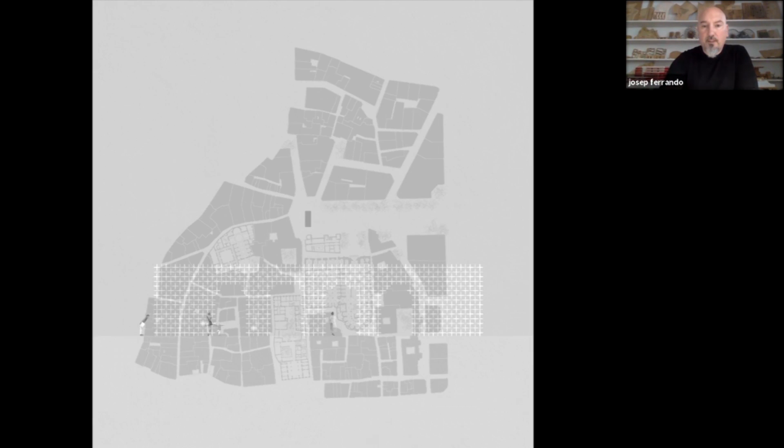And we had to build something related to the word identity. We took the word identity as the architectural and construction identity of Barcelona. And Barcelona had different ages in terms of identity. It was the Roman city 2,000 years ago, later the medieval city, and nowadays we have the contemporary city. Everyone was more or less shown in different, or with some different kind of shapes or constructions.

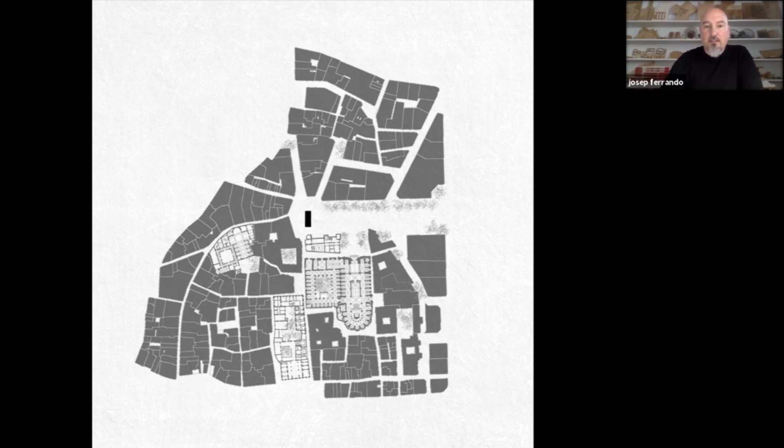The Roman city was related to the Roman aqueduct, but at the same time with the Cardo and Decumanus, so all the organization of the cities. The medieval area was related to the Catalan vault. And the contemporary city was related to the ensanche, the enlargement, designed by Cerdà. So the idea was to build something very abstract, this black piece that we see here, that's 20 meters long by 6 meters wide, just located in the place where the former Roman wall was located. And it's just in the door of the Decumanus entrance.

So what we decided to do is to make the piece as simple as possible, that is able to be recognized or assembled in different ways in order to show these 3 things: the aqueduct, the vault, and the idea of grid related to the ensanche by Cerdà. But first of all, what I was trying to transmit to the students that we were deciding and building together is what 'ephemeral' means.

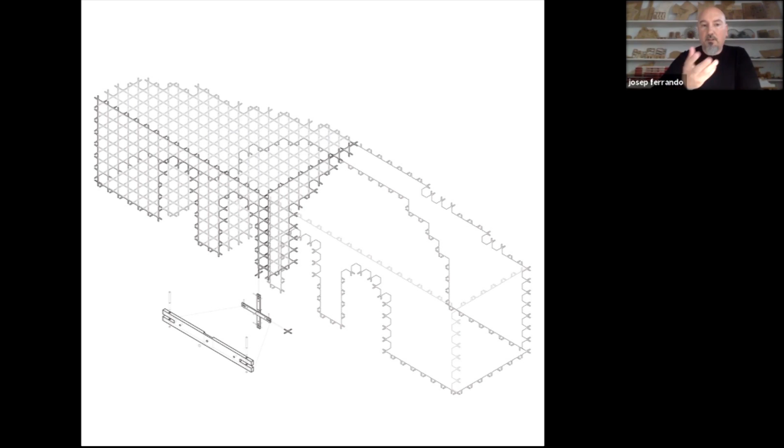For me, there are 3 things that are crucial. The first one is that when something is ephemeral, you should touch as little as possible the place where this piece will be. That means no foundations, for example. The second one is the idea of circular economy - what is ephemeral is the use, but this material is coming from some place and should be going to another place to be used in a different use. And the third one is material efficiency, to use the material as it is without wasting material. That's the piece, as simple as possible.

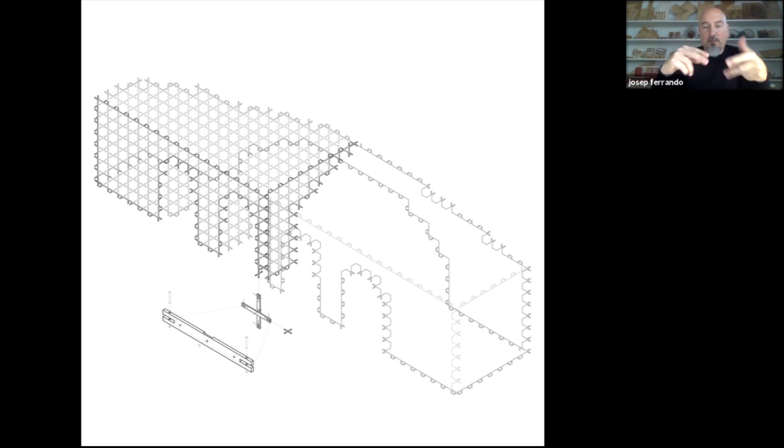That was a piece of 40 centimeters by 4 centimeters by 1 centimeter with some cuts on the limits, so that this asymmetric geometry, 4 by 1, allows us that when you assemble these pieces, the next piece provides 3-dimensionality. These are the minimum pieces that we should have in order to have an inner space, because the idea is always about generating some kind of domesticity or inhabited places. So it's not only a place that you see, it's a place that you inhabit. So it's always like a cave inside the nest.

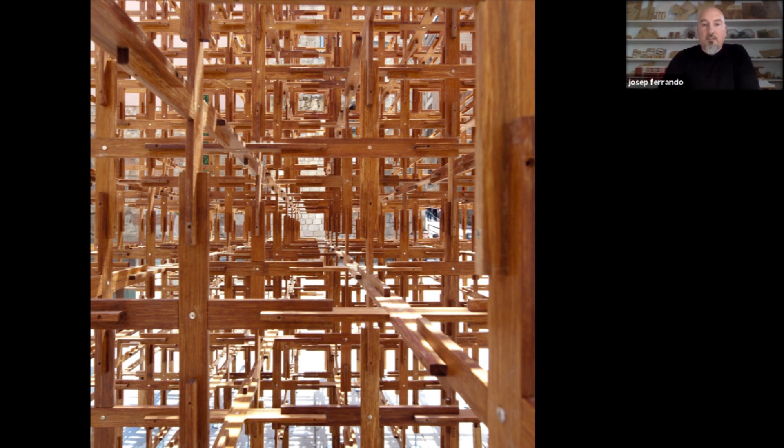So here we can see the pieces and how these asymmetric pieces are assembled, providing the way the piece touches the ground, and giving us an irregular perimeter that didn't allow people to climb. That was one of the worries from the city hall.

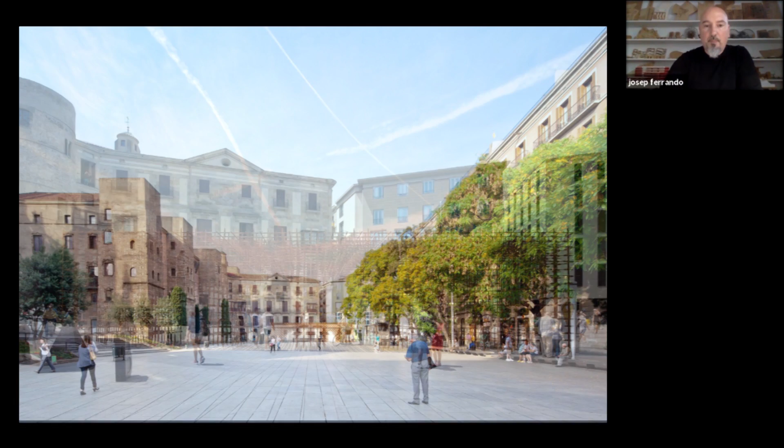You see from that side the aqueduct following the former aqueduct that we have on the left side, and on the other side was the Catalan Vault where they organized different events during the 3 months that thing was here. On the right side, we see people inside. It's like a cave you can inhabit, not only to cross through in a visual or physical way, but even to inhabit.

So in order to touch that place as little as possible, all these elements touch the ground at several points to share the loads, so that you don't need foundations, but at the same time have enough weight that it's not possible to move by hand or by wind.

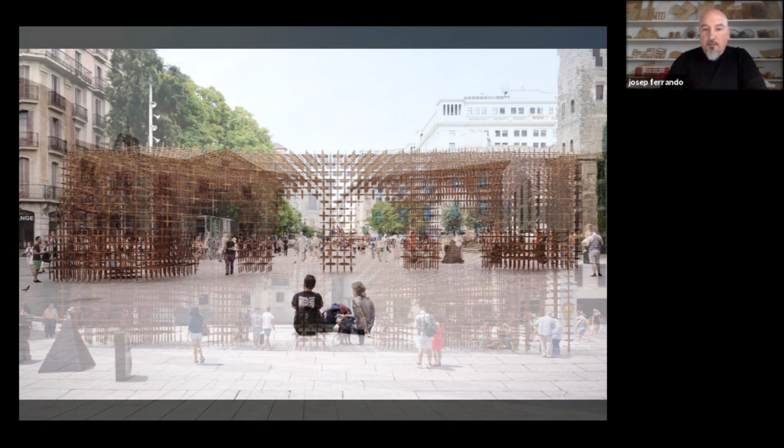The way it touches the ground is the only piece that is different. It's a stainless steel piece, with a screw that allows it to calibrate to the land.

As you know, public space always has inclinations. What happens here is that this stainless steel piece provides horizontality for the pavilion, while at the same time separating the wood, which is the material of this installation, from the wet area of the floor.

After 3 months, all these pieces, in different groups, were moved to different kindergartens of the city. And when the kids destroyed this kindergarten, these playgrounds that they made with them, the pieces were moved to be used as organic compost.

This is another ephemeral installation, in Ocho Quebradas. It's 8 cliffs in the northwest areas of Chile, about 3 hours by car from Santiago de Chile. In that case, a person, an engineer,

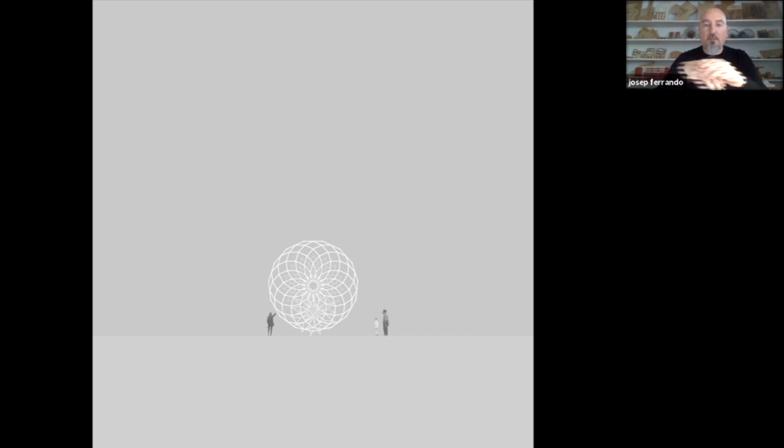is organizing a new housing community with 16 houses: 8 houses designed by 8 Japanese architects like Fujimoto, Nishizawa, Ishigami, etc., and 8 houses designed by 8 Chilean architects, Alejandro Aravena, Max Núñez among them. And the guy organizing all this asked me to design a door, a threshold, in order to arrive to that place.

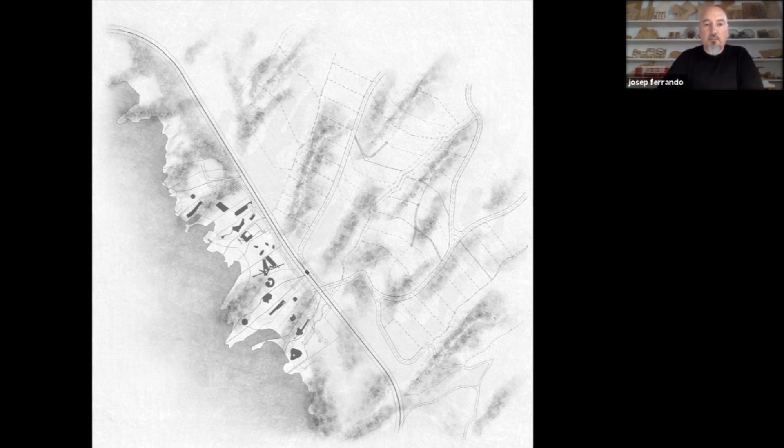That's the place. This is the plan with the 16 houses. None of the houses were built when I was asked to design the door for that place.

When they were sending me these images, the first thing I asked was where they wanted to have the door. They answered, whatever I want. That's the worst answer you can receive as an architect, so it was difficult to decide where to put the door.

But I was always worried about how to relate something to the domesticity of the existing houses that would be built in the future, while also relating it to the landscape scale, even where we don't have these houses.

So it was great, because I decided to put something above, like becoming a kind of basement or the carpet of the project, to understand that the train tracks are the ones related to the landscape scale. It's like a basement because it's horizontal, and it connects the whole country from south to north.

So it's like doing a project that occupies the whole country. At that moment, I decided to begin working on this ephemeral project, related to the idea of movement, and related to the idea of wind.

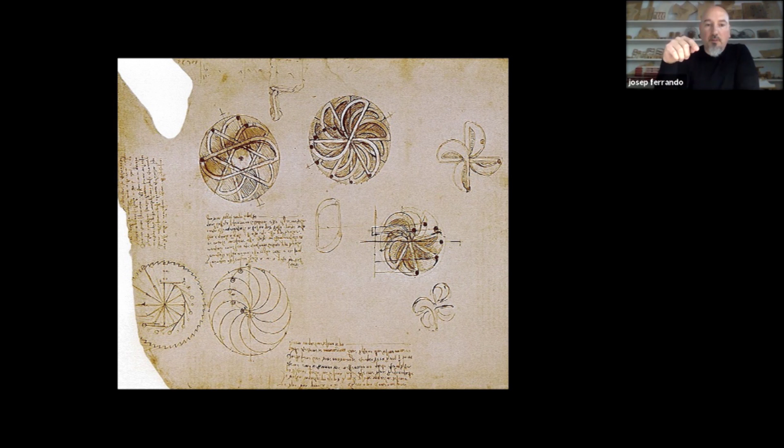Checking how a wheel is not only a one wheel. So a wheel, in order to work, you have to work with a wheel made of wheels. There are wheels that are multiplying the speed, wheels that are changing the direction, and wheels that are collecting energy, etc.

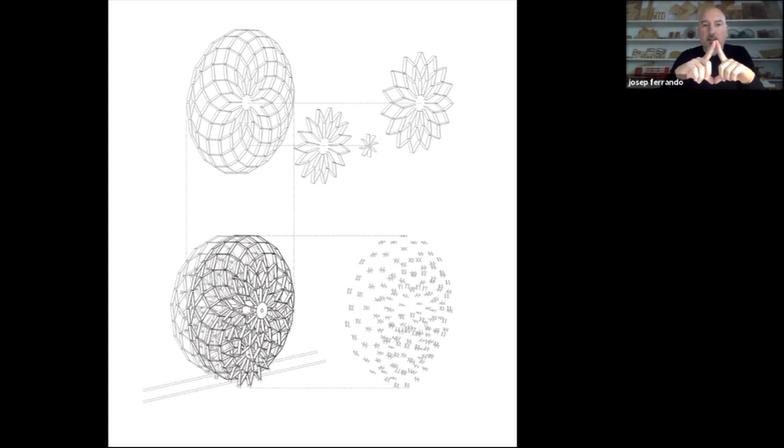So finally, what I designed is this wheel of wheels. It's a wheel made of 8 wheels, made of 800 times the same piece. In order to work with a double system that needs a radial system from the center and a tangential system on the perimeter, I was changing 8 times the angle of this kind of diamond, so the diamond changes 8 times the angle in order to become from radial to tangential.

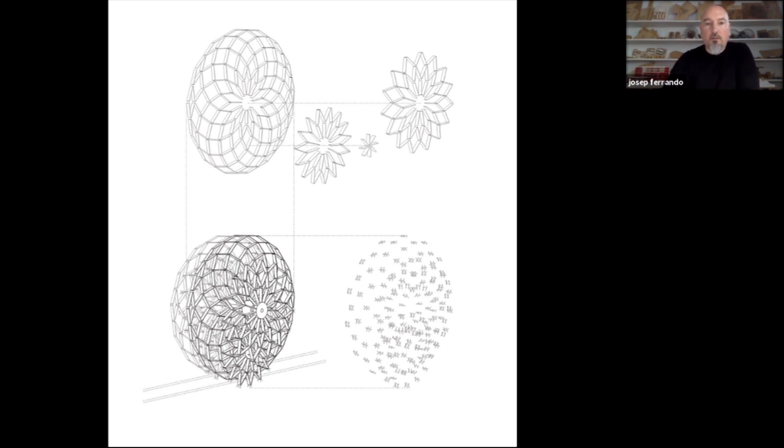There are only some steel joints connecting the pieces, so that the wooden pieces always stay equal, and the steel pieces are the ones that are changing the angle.

There was another challenge: my friend asked me that this piece should be built with 50 students. So after designing it, we made this raw construction with 2 scaffoldings, one following the other, with a crane and a pulley with the axis of the wheel, so that you could build the wheel on the floor.

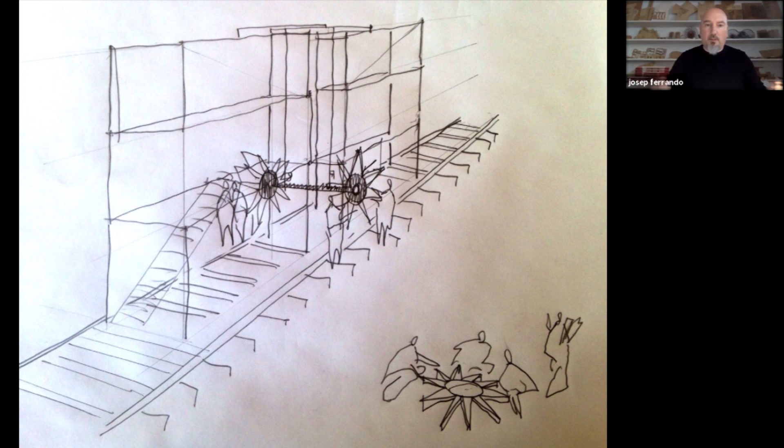The only thing you have to do is make the first ring, then pull up, then do the second ring, etc. And then the smaller wheels could be built on the floor and then put into place.

These are the 4 wheels on the floor. Finally, the wheel is 6 meters in diameter, so more or less it's related to a double height. You feel it has some kind of domestic scale, but at the same time it has the scale to go through. So the train tracks became a pathway to arrive, and the wheel became a door.

I decided to put the initial point of the wheel just in between these 2 dunes, in order to perceive that the wheel is bigger than the train tracks. But when you see these train tracks from far away, it's different — we can see the wheel as a dot in the middle of this. So finally, the project is all the train tracks, but the construction is only the wheel.

And the location is changing constantly. So after the client kept asking me where I should put the door, I finally answered: wherever you want, because the wheel was able to be moved to different places. So the door could be changing constantly.

The third one of this first group is an ephemeral installation from last year, 2019, in Barcelona. Barcelona organizes every 2 years a fair about construction, one of the most well-known fairs in Europe about construction. As you know, fairs are always plenty of stands, each with its own brand and products, but the organization was running a competition to build and design the common areas.

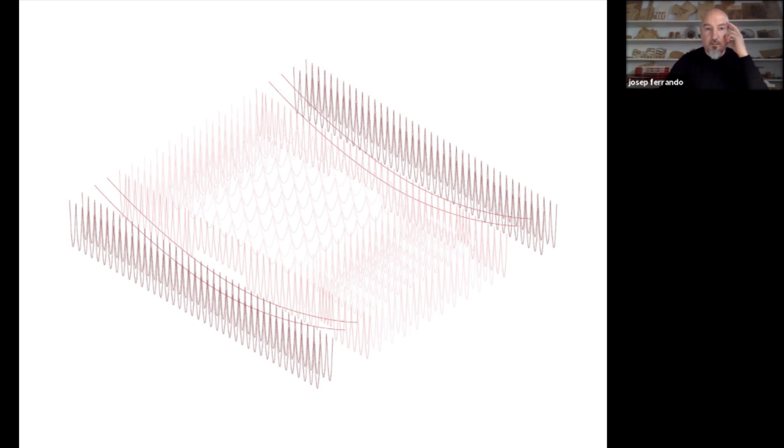So finally, I obtained all the material to make the space and all the material to make the furniture for free, using waste material. This is the axon of the space called Talks, the space for lectures. There's also a space for meetings and one for the future, but I'll focus on the Talks space.

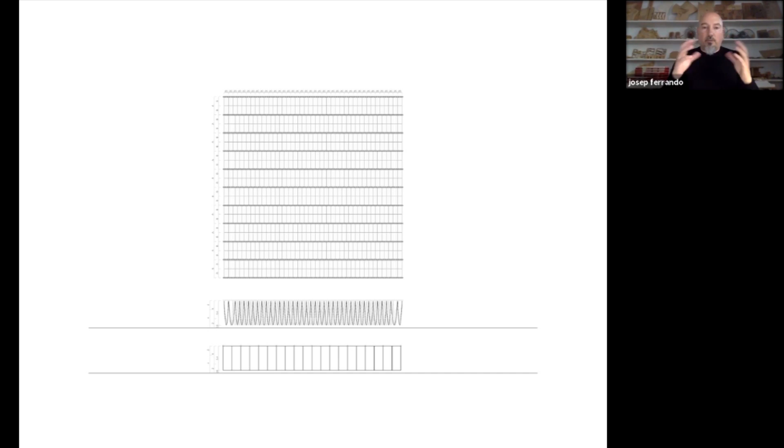So when you work inside another place, like this one inside a Congress building, you have to understand that you are always embedded in another place, so you have to take care of the rhythms of that place.

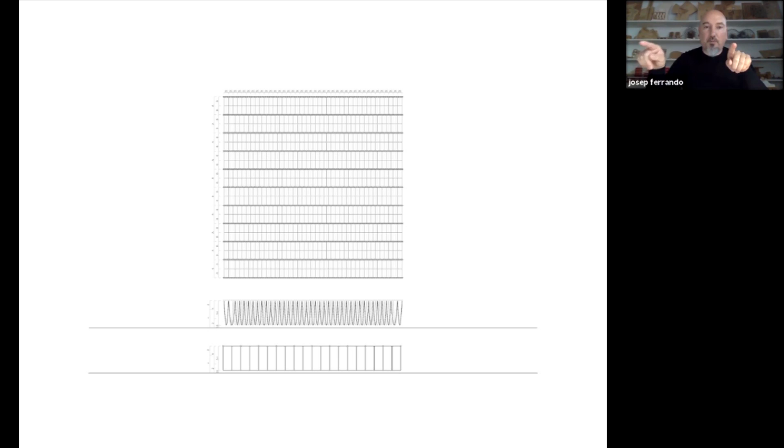So the horizontal darker gray lines are always the trusses, which depend on the rhythm of the structure. These trusses are always separated by 4 meters, the distance of 2 rolls. At the same time, the rolls always have catenaries related to the rhythm of the triangular shape of the trusses. So everything is very connected and embedded, so that finally it seems nothing happened.

In order to enter, it's always the idea of a door. And entering is not about crossing a door, it's about approaching a place - how you enter a place for a lecture, coming from a building that inside has 12 meters height.

So from 12 meters height, you pass to 6 meters height, which is the upper part of these catenaries. Everything is hanging from 6 meters height. Then you go down, down, down, to 2 meters, and you cross - you have this sensation. You go through this process from 12 to 6 to 2, then you turn 90 degrees and begin to enter that place - the space for the lectures.

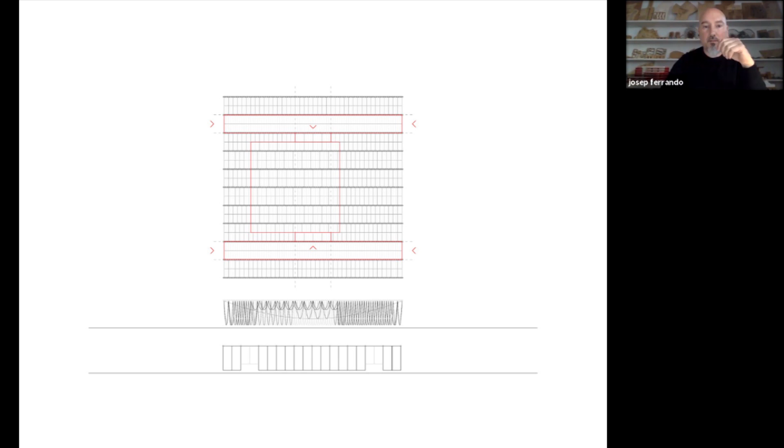Those were some of the images. Obviously it didn't happen exactly like this because not all the beams were equal. So finally what I decided with the beams was to group them by colors and lengths, and the idea, since they work as beams, was to have the longer ones in the upper part and the shorter ones in the lower part, in order to work as beams, as you will see later.

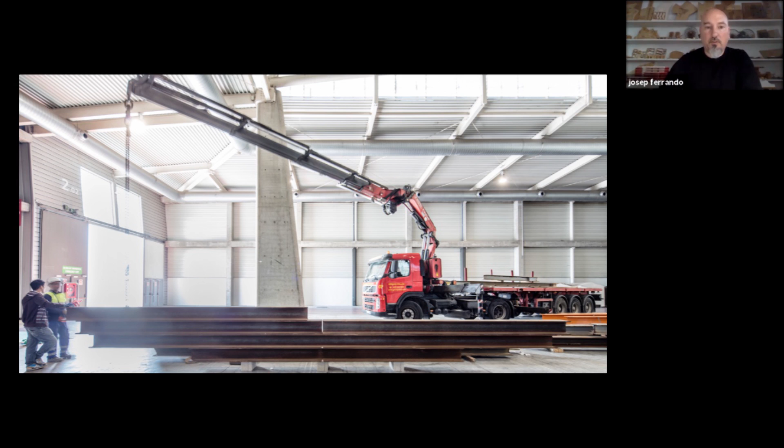This is the space behind for the VIP area, for the people giving the lectures. And these are more or less some pictures of the construction. This is the same truck that came from Sagrada Familia - they put these pieces in the way we asked, since we were designing and thinking at the same time as the construction.

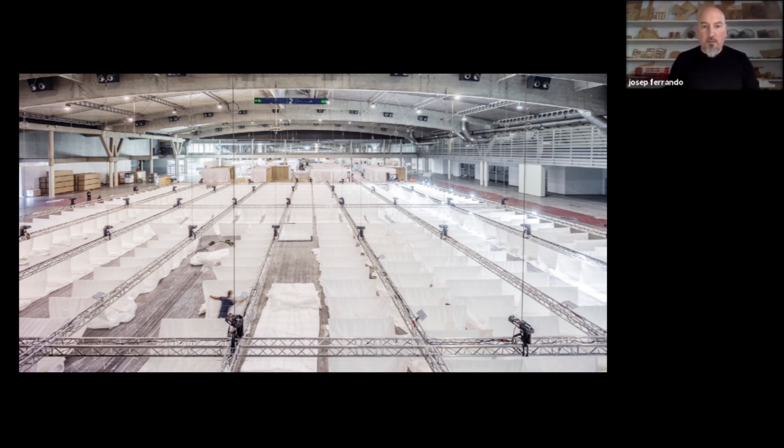That's the construction of this piece for the Talks space, 40 meters by 40 meters, with all the trusses related to the structure, cables, and everybody working on that. So finally when they finish that, they move up, the trucks enter with the beams, they put the beams in place, and then we move down again. This is again under construction.

You can see here how the beams were selected per color, and later selected per size. The shorter ones were on the lower part in order to work as a beam with cantilevers. The last ones are almost 20 meters and 1 ton in weight.

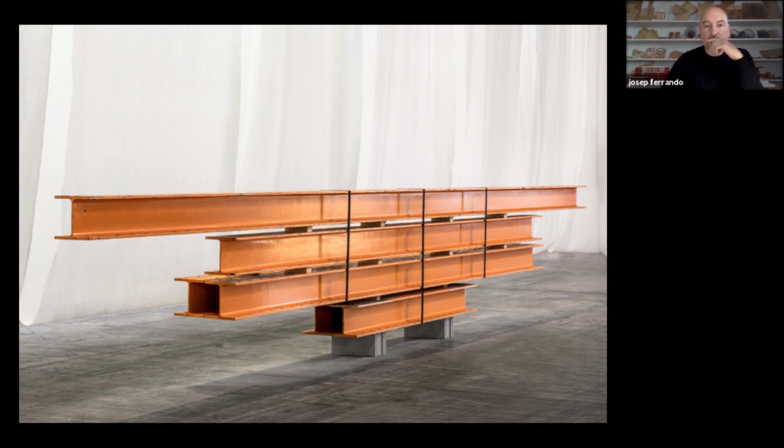They were stacked in order to define levels of benches, tables, or bars, using the shapes and levels of that, with small joints in between in order to build and stack it with cranes, and to be able to remove it.

For the people crossing in that direction, every 2 pieces, so every 4 meters, the module of the catenary was moving half a module so that you weren't able to see directly in that direction.

Finally, after 3 days, they rolled it up again, and now they are used in different roofs, etc. The beams are again in La Sagrada Familia, in fact 4 blocks from here.

I'm going to domestic infrastructures. I will talk about 3 houses very fast: one is in the landscape, another one is more like in an urban space, and the other one is inside another house.

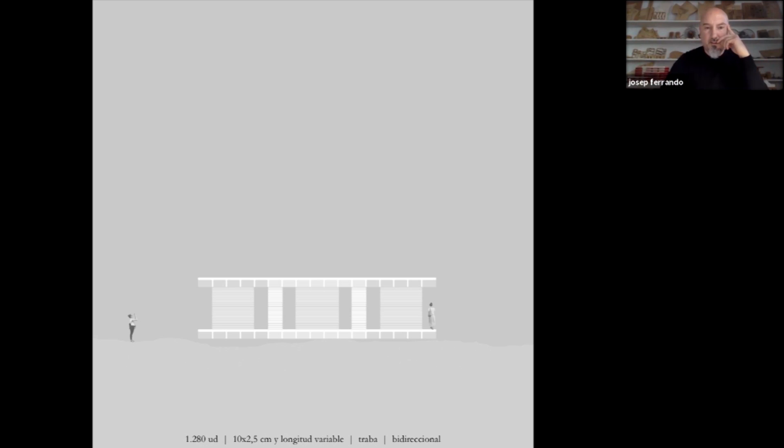And then in the same area as we're seeing here, the house that I did is that one. It's a house that is bidirectional, a square because it doesn't have location, so it will have location in terms of how you use it.

The second thing is how you do a house that is for everybody and for nobody. So it's a holiday house or weekend house. What I did is a square made of 9 squares, called 8+1, because there's one you are not able to change.

That's the one in the middle. It's a very vernacular house, because it's 8 squares surrounding 1 square in the middle that is the fire, the kitchen. So it's very vernacular in that sense.

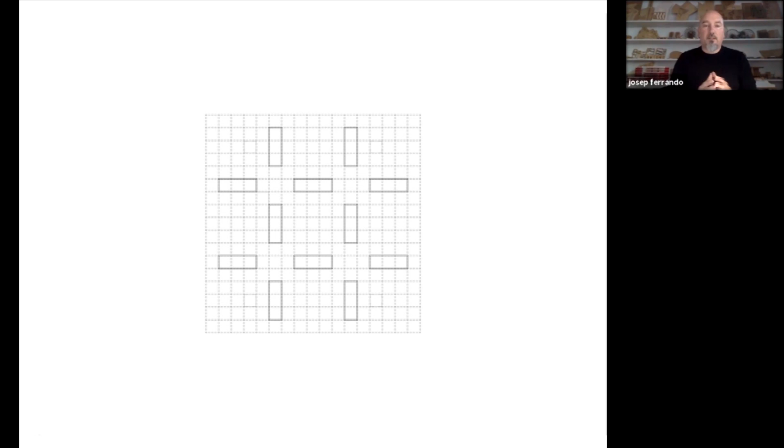The 8 squares surrounding that piece are defined by these wooden blocks. This one has wet facilities, so water facilities, or a storage space—a way of having a non-hierarchical space, undefined spaces, that you can occupy as you prefer.

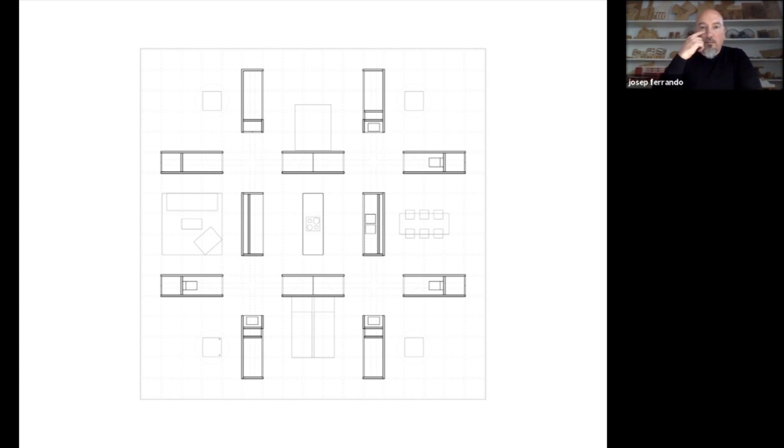That means you can have, as we're seeing here, in the lower part like 2 single bedrooms, and in the upper part 1 master bedroom or dining, living, always with the kitchen inside.

Then the question is that instead of having a room for the bathroom, it's to have a plurinuclear bathroom: the toilet in one place, the shower in another place, the sink in another place.

The idea is that the space that is like a cross inside the square works like Marcel Duchamp in his studio. It's like a door with 2 halls, so depending how you open the door, you're closing one space and incorporating one to another. You can inhabit the house as you want.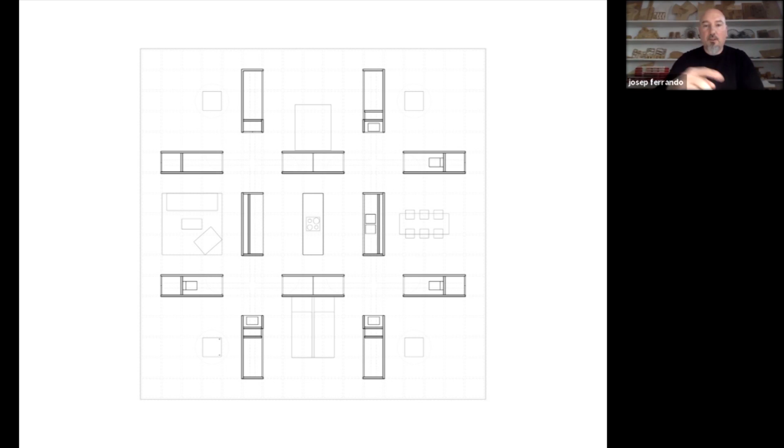I was putting some conditions, like wanting the 4 corners to be an open room, not an inside room, in order to understand that this is a house not provoking convexities to the landscape—it's always embracing, provoking concavities to the landscape.

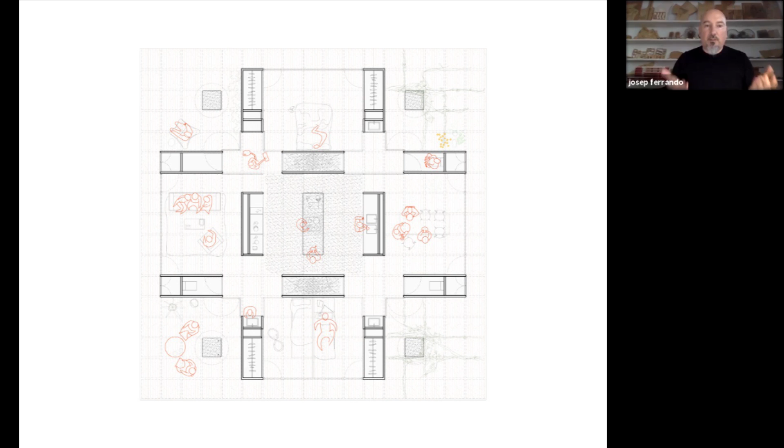As you see here, the floor is a wooden grid that sits above 4 big concrete beams, which separate the wood from the floor, but at the same time organize some kind of horizontality in that area.

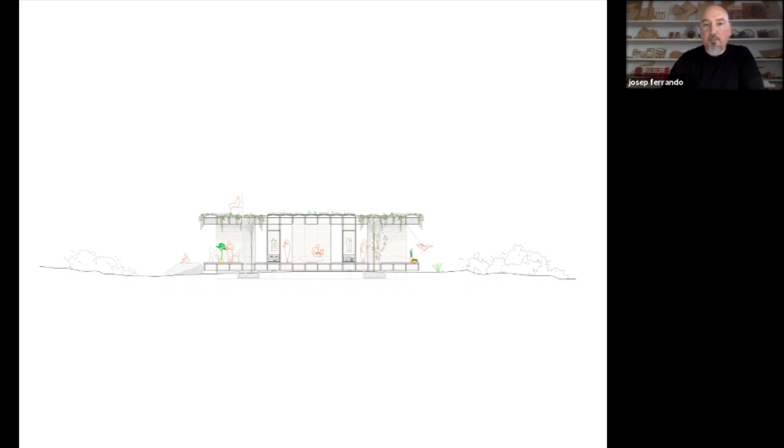There's some kind of assembling spatial system, so you're living in some kind of a joint of wood. In this exteriority, the pavilion tries to be like an unfinished project. It seems like an unfinished construction or like a ruin in some way. The corners are occupied by the vegetation, but at the same time there's the idea of having elements that make you feel you're inside and outside, like the swing. So you're swinging up and down, and then you feel like you're inside the house.

This always provides the idea that in a weekend house, a house could be different. Depending on the location, on the orientation, you will choose how you put the bedrooms, rooms, etc., or depending on your domesticity.

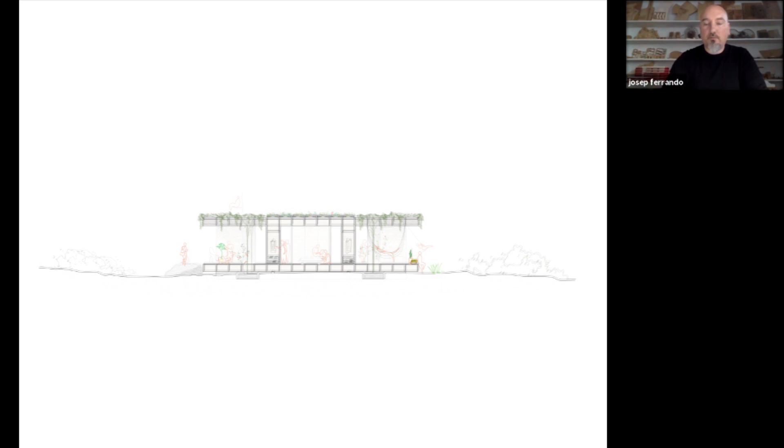The idea is to always have the house next to an existing stone, so that the stone becomes the anchor of the house, but at the same time is the stairs of the house. So the house increases the perception of having a bigger house through two mechanisms.

One is the idea of diagonalizing the space, so you always have diagonals in every direction. The second method is that you have to always have endless circulation, because as you have these elements isolated, the baths, etc., you can go around constantly.

Finally, the space in between, the kitchen, has an open roof so that you feel you're cooking outside but you're actually inside. So this is the only piece that is not able to be moved. It's a house around a fire.

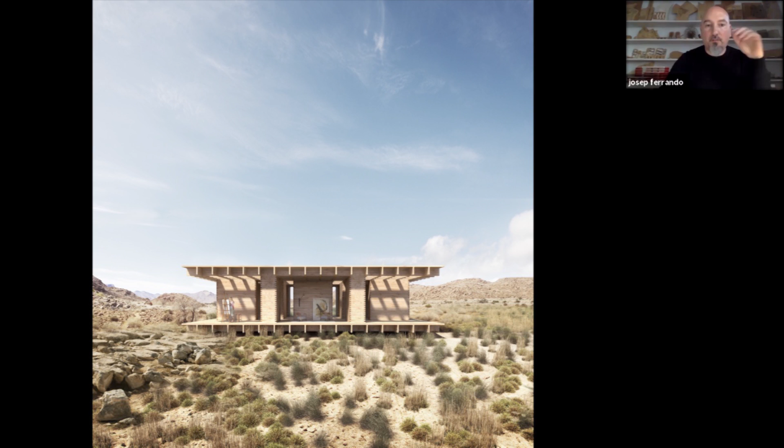Of the house, the four beams, four concrete beams, will allow you to have this horizontality, etc.

In Asunción, Paraguay, we're just finishing a house. That one has two beams. It's like a big table, two beams inside an enclosure, a brick enclosure.

This is the landscape of Paraguay. It's always very nice because it's called Tierra Colorada, a red colored earth, and it's a beautiful color. You find this kind of construction on the roads, always with brick, red brick, etc.

This is what is called culata jovai, the typical or vernacular house, because Paraguay most of the year is very humid with high temperatures. Normally the house works like this: you have two bedrooms separated by a living room, with a pitch roof that allows the hot air to go up, and then you have this kind of cross ventilation.

So we were trying to work in the same way, to have the bedrooms and rooms on the side, with this kind of air circulation, being able to be close or not, but at the same time avoiding corridors. So in fact, the house is inside an enclosure for security, but at the same time the brick enclosure is the one that has some of the servant areas.

Finally, the house is two beams with a roof. There will be a green roof, which is the one that will allow you to be like a flying carpet, floating in between the park that is in front of the house and the park on the other side of the house. So you are like in some kind of green flying carpet among two elements.

So by security you are closed, but at the same time on the upper part of the house you are connected with the rest of the landscape. As you see here, you can open totally, you can see through, etc. There are only two brick blocks that contain the bathrooms, one bathroom for one room and the other bathroom for the other room.

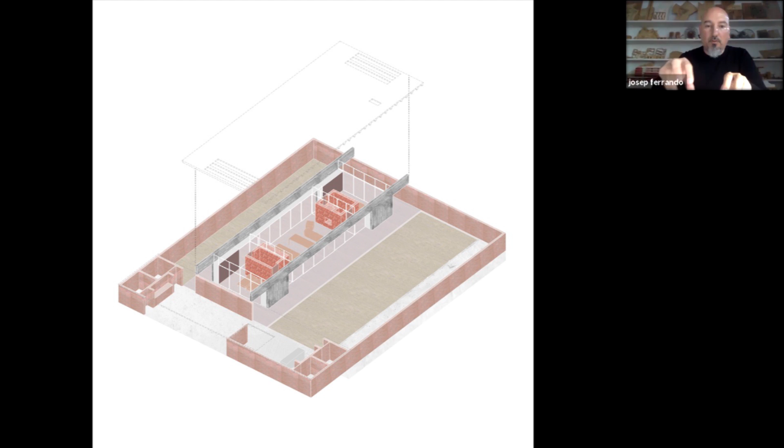Now we'll see. Here we can see the enclosure and only two beams. So there's a house that has like a house of brick with two boxes of brick and two elements. This is the house under construction in the last months.

And this is in Asunción, Paraguay. And again, as we saw in how they were stacking the bricks to cook the bricks with brick ovens, we were using exactly the same techniques here. So the box inside is solved in the same way that you can find in the brick ovens on the path.

So from outside, the only thing that you will see is this kind of a brick fence. And here in the upper part, we will see how it appears, the concrete platform, that finally this concrete platform would be a green roof floating in between these two green spaces.

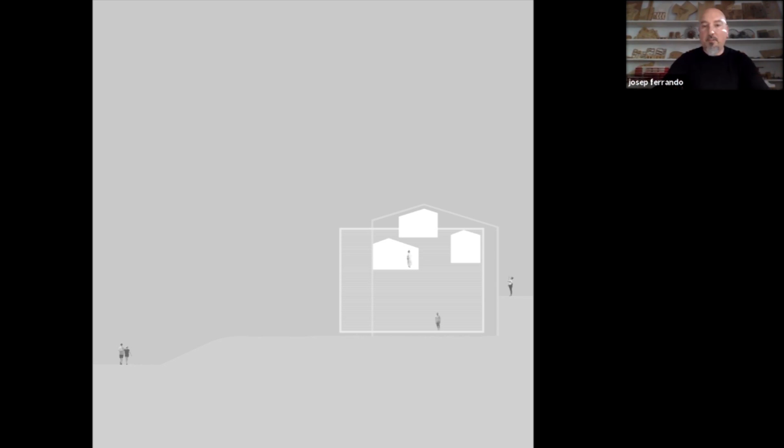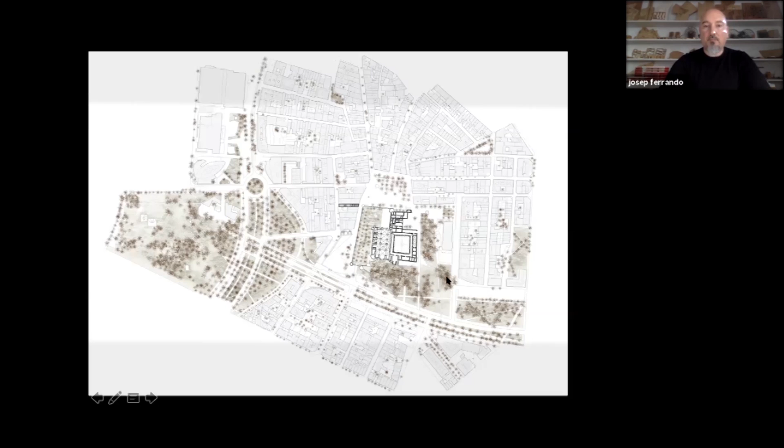And the last domestic scale is a house inside the house. It was built like 5 years ago, more or less. It's a house that we'll see is in that place, in front of the monastery. So we had to leave to maintain the main facade and even the roof, because it was the surroundings of this very nice monastery. So the house is that one that we see here with the light on the right side. So we had to maintain this facade.

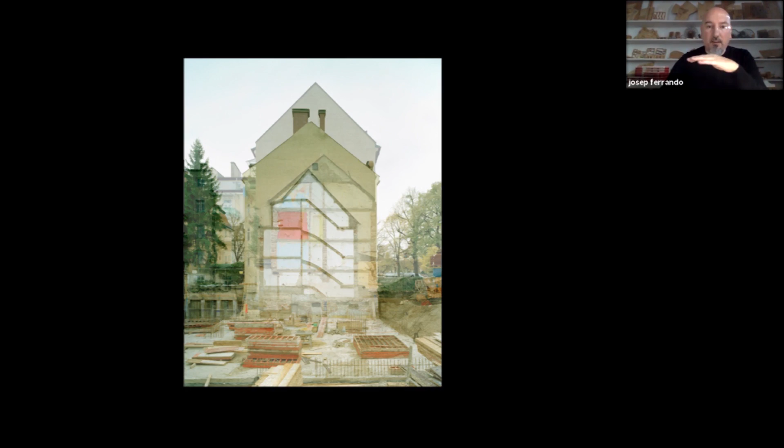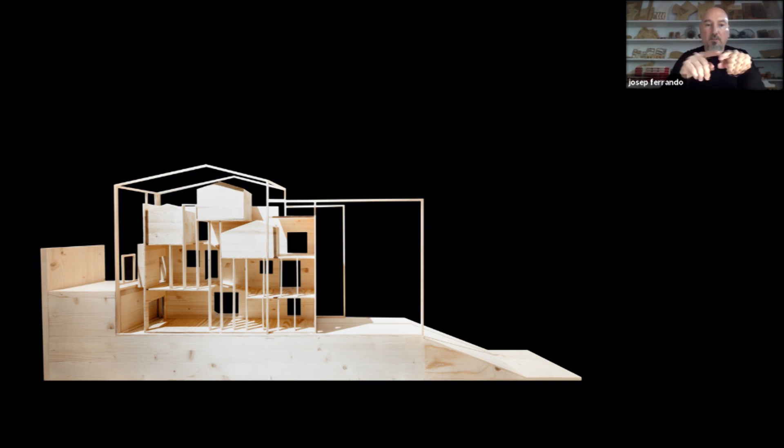That's the house. So the house is made of brick concrete precast pieces, with wooden houses inside. As you can see, the slabs are in different levels, you can always see through. The pieces are always next to the floor, next to the facades in order to have light, in order to generate some kind of void inside that becomes the core, or the space among all the spaces of the house. So there are only two materials, wood and concrete, inside the ceramic existing house.

As you can see, the house is moved and it generates two kinds of party walls. It's a very narrow house, a space of 4.5 meters. But instead of having the stairs in transversal direction, I exaggerated the longitudinality in order to play with the perception, as the 8+1 house. So the stairs are in the longitudinal direction in order that you are always entering in the party wall. So there's a party wall that instead of having 20 centimeters, has 90 centimeters. So you are entering the wall to go to another level.

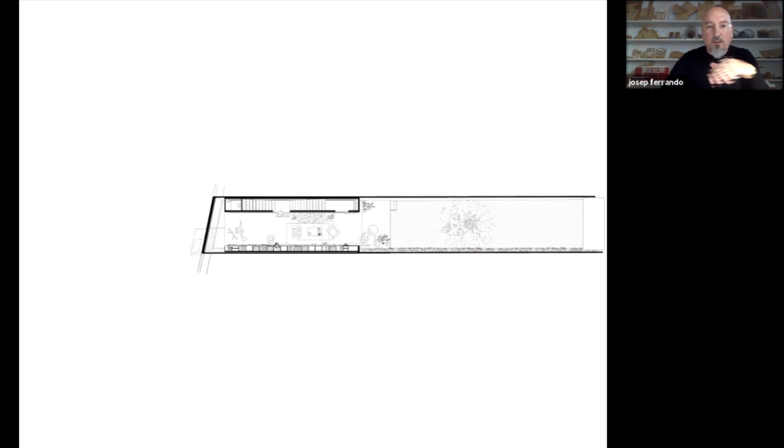And then this idea that you are inside the wall, that you feel that you are really, really in a narrow place, makes that when you arrive in the wooden areas, you feel that the space is lighter and much bigger than they are. And on the other side, we have another party wall that is 40 centimeters wide, that is space for storage and energy circulation.

So these are all the floors, and we go directly to this. So you're always circulating in that area, so there are no more stairs than those ones, and those are always in between bricks. Here we can see how there are windows facing the new house to the left, and facing the ancient house, a former house, to the right. And then you arrive to those places and you feel that these places are much bigger, not because of comfortability, but because you have passed first previously to those other places.

But at the same time, when for example the kids are opening the window, the room becomes a window of the kids, because they open it and then you provide light here. Or the shape of the bathroom with this archetype, with the pitched roof, provides that the joint between the old house and the new house provides light to the core of the house.

So this is the core of the house, which is the kitchen, and it's the space without windows. But you have a lot of natural light because all the spaces are shaping the light to provide light to this kind of inner space.

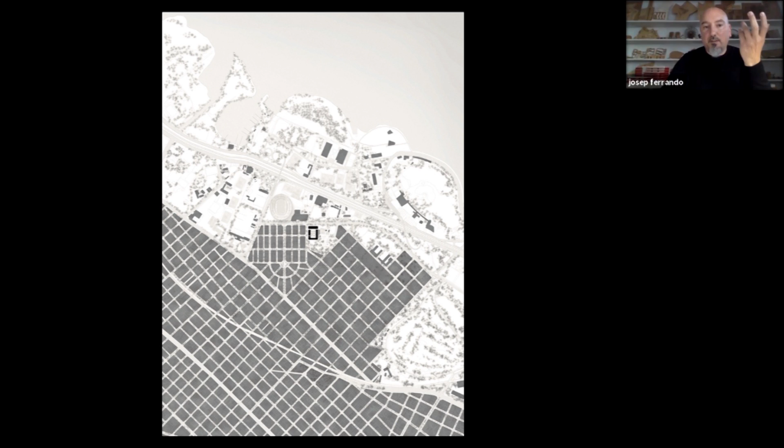Finally, there is a third material that organizes the inside spaces: modular wooden furniture, or wooden storage areas, etc., that organize the space in between. So this is the campus.

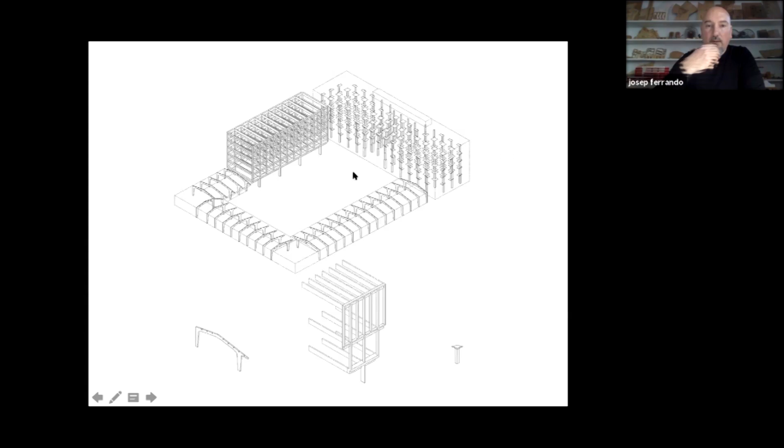So here we have some kind of frames that exist, and this former water tank with these columns, very nice. The idea was how to work more or less with the same kind of structural personality. So here we were working again with the idea of columns and frames, with this 20 meter long frame and the columns becoming some kind of tree-like formal element.

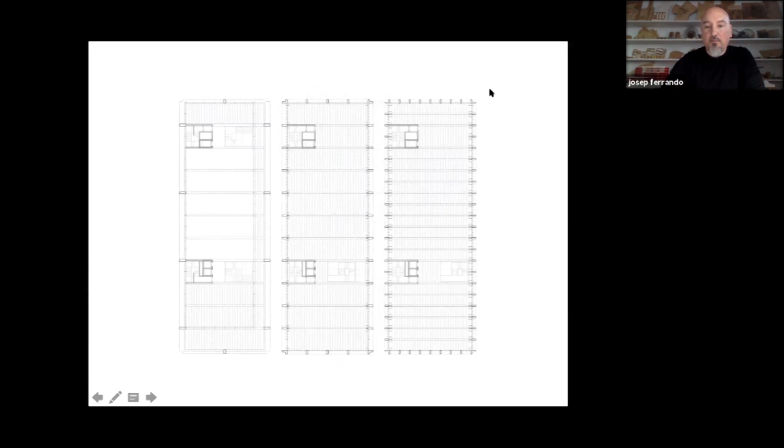So you can see the plan. This is the ground floor, the first and second, and the third, fourth, and fifth. Everything is organized in order to have the mechanicals and everything here.

But again, as we saw in the ephemeral intervention in Construmat, everything is related to embedded rhythms. These 15.60 meters that we have in the ground floor are related to the dimension that we have in the entrance of this former building. So everything is related to the four elements we have here, or as we'll see, this kind of porch is related to that one.

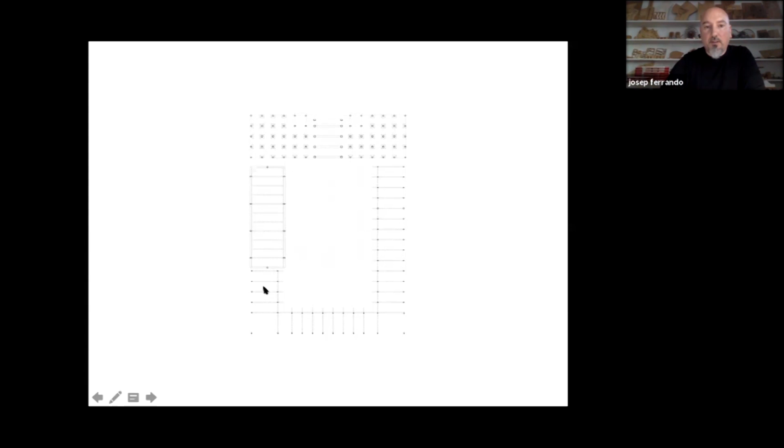So in the ground floor, the facade is moved back in order to have continuity, to be related to the scale of that building and the scale of that one. The emptiness, the void of that one is related to the lower part, and the massiveness of the new one is related to the old one.

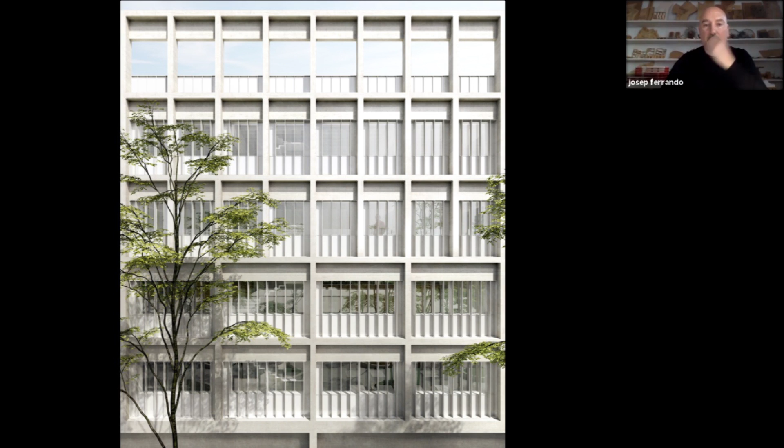Here we can see this is a thick facade that contains everything. This is a facade we have been working on with the renderings for the competition. This is under construction in Buenos Aires, and now it's finished.

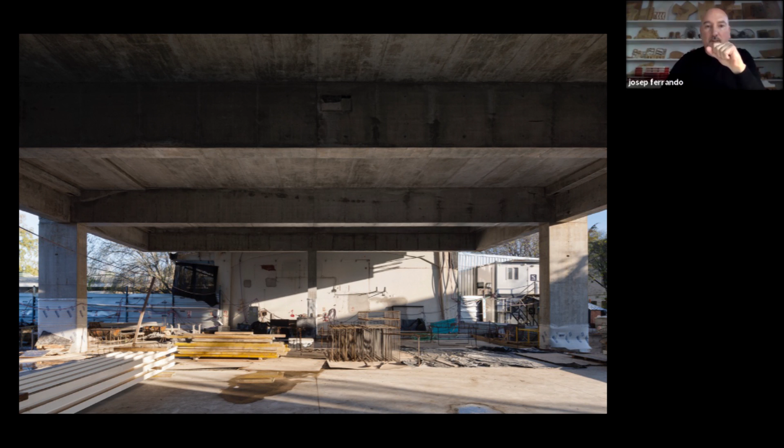As we can see, the structure is the pattern of flexibility. These are other pictures from under construction, and we can see how we have these 20 meter concrete beams. From these elements, the stairs, for example, are hanging from 25 meters height.

So when they arrive to the ground, they are not touching, in order to explain how these things are related to the rest of the materials. Inside, how you organize these things is related to, or organized with, wood. These are the most fragmented rooms, or floors, sorry.

And when you are in the upper part, here now it's like this glycina is just growing. So in some months we will have some kind of red-blue color hanging in that place, in order to have some kind of shadows. And again, the repetition of this structure every 2.6 meters provides us this kind of picture, a smaller or continuous picture of Buenos Aires.

I think I will pass that fast. If not, we won't have time.

This was a competition where we obtained second place in Mendoza, a very amazing city for wine in Argentina. It was a building inside an existing building.

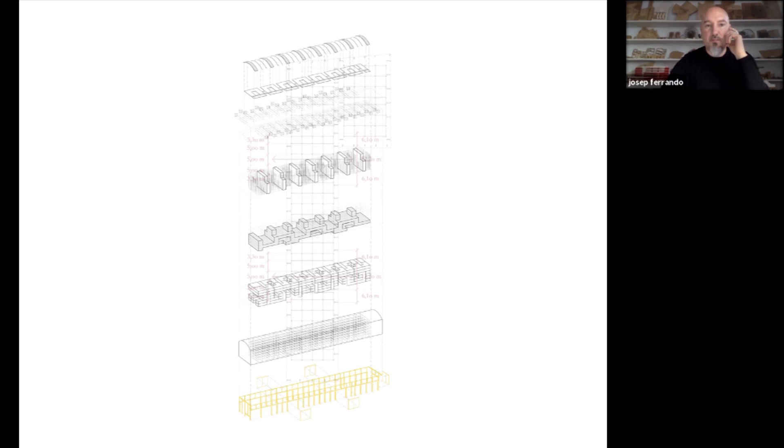So we had to put some kind of houses, offices, and commercial spaces inside an industrial building. And we organized that existing building. We only removed the skin of the existing building in order to be transparent, but at the same time to be some kind of protection from the climate.

Because it's a climate with 15 degrees of difference in one day, that was like some kind of protection, some kind of skin, in order to protect the new building inside.

As you can see here, the winter conditions and summer conditions, in order to have some kind of Mediterranean climate in a building inside a place that has another kind of climate. You have to think that this is a space that is a desert, but because of all the irrigation system organized since 100 years ago, every street and every sidewalk has an irrigation ditch system that allows the city to become some kind of oasis.

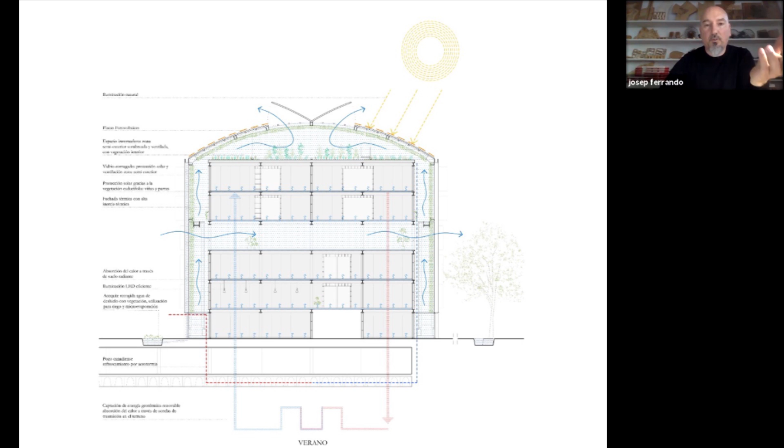So the idea was to work in that sense, to use all the irrigation system of the city, as we can see on the right side, in order to irrigate some kind of vegetation layer in this facade that allows us to have a more humid space in this dry climate.

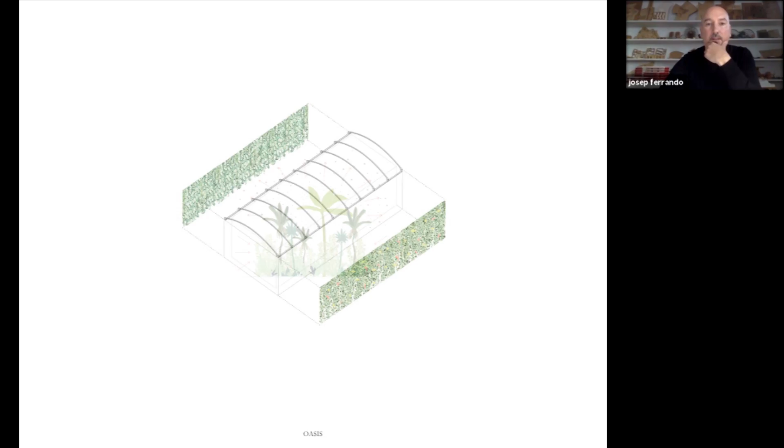And only to finish, the Rio de Janeiro project. There is a project where we finished the executive project some months ago, but because of political reasons, it's totally stopped now.

It was an old building that some years ago was partly refurbished to become a design university, a design school. They asked me to design or refurbish the other part that was more or less in ruins. But it's an amazing place because in the 20s it was thermal baths.

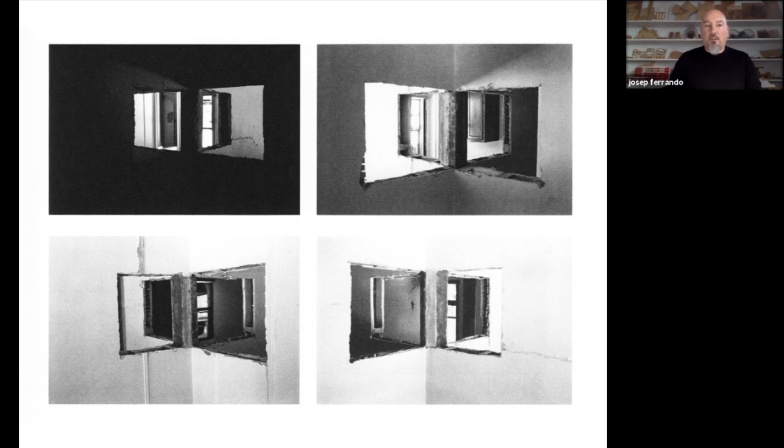And with that attitude, I was defending, and it was finally approved by the City Hall, to make as little intervention as possible, with strategies like Gordon Matta-Clark's, where opening only 4 windows in 4 corners of non-connected rooms provides some kind of connection that wasn't there before.

The idea was to work in a way inspired by Lina Bo Bardi, doing as little as possible in order to fix the ruin, so as to make it possible to be inhabited.

So the idea was to refurbish in a way that the only thing you do is fix it in order to repair the structure or to waterproof everything very well. But the idea was to use the same structure you need to build it with to inhabit it later.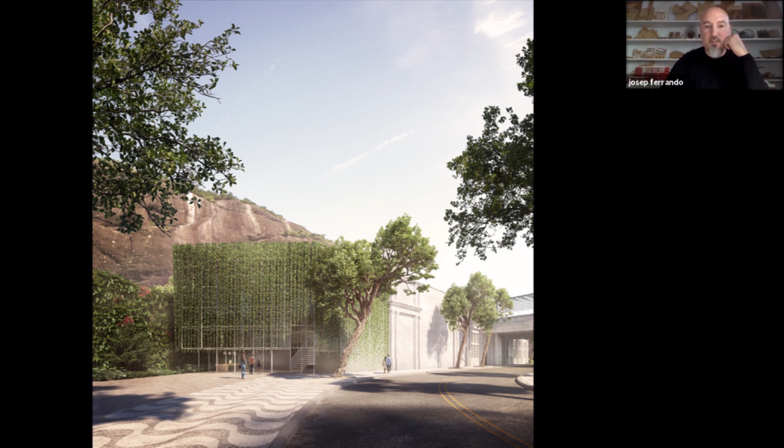So to use scaffolding, all the structures like scaffolding that you use to refurbish it are the same ones you use later to be colonized by the nature, as we can see here in the new entrance this building would have, or to be colonized, for example, in that place inside, by the vegetation, but even by the people.

So the idea is that all this kind of infrastructure to fix and stop the degradation of that place will be the ones that organize in the future the colonization of the people, the uses, the models, as we can see in the lower part, etc. So to domesticate, to convert that into some kind of public domestic space, using the same material that you use to fix the degradation. Thank you very much.